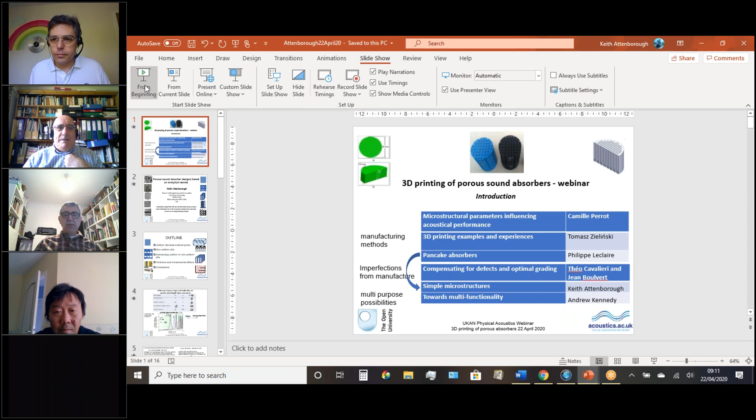So I'd like to explain a bit about how this came about, or how the original workshop where we were going to meet face to face came about, and what I'm hoping the various people that I've managed to persuade to give presentations will contribute.

So 3D printing and porous sound absorbers offers a good new opportunity. Well, I say new, people have been working on it for a few years now, but one of the problems is to do with the fact that the opportunity it offers is that you can actually design a microstructure to give a target performance. And that's quite exciting because otherwise you have to do lots of things in terms of mounting and air gaps and so on in order to achieve a given performance with a regular sound absorber.

The problem has come about because although you've designed this microstructure, when you try and 3D print it, there are lots of imperfections. And we're going to hear a bit about that both from Tomasz Zieliński and from the Le Mans people, Théo Cavalieri and Jean Boulvert.

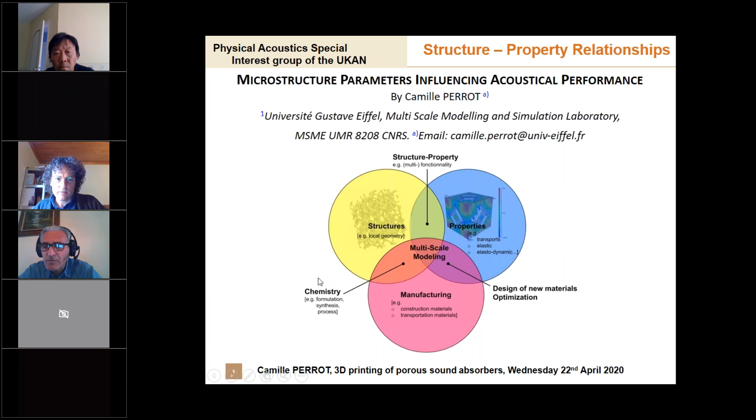So we'll try to skip to the next slide. Here is a rather classical slide.

The motivation is that fibrous media, foams, or granular media are known to be able to mitigate sound from their transport properties, I mean microstructural and transport properties. So basically, we are interested in linking microstructures with transport and acoustical properties, whether we have a periodic or random microstructure.

So the problem will be, in a way, more easy to deal with for 3D printing, because in essence we are dealing with periodic microstructures, and you will see that it's convenient for the classical numerical methods, which are now well established in the field.

So basically, one of the methodologies which has been greatly used in the field is to generate a representative volume element of the porous media, the porous microstructure, assuming a scale separation, which means that the wavelengths for audible frequencies are greater when compared to the sample scale, and also when compared to the characteristic features, the characteristic scale of the microstructure, basically a typical pore size. Another assumption could be, but doesn't have to be firmly respected, the rigid frame assumption.

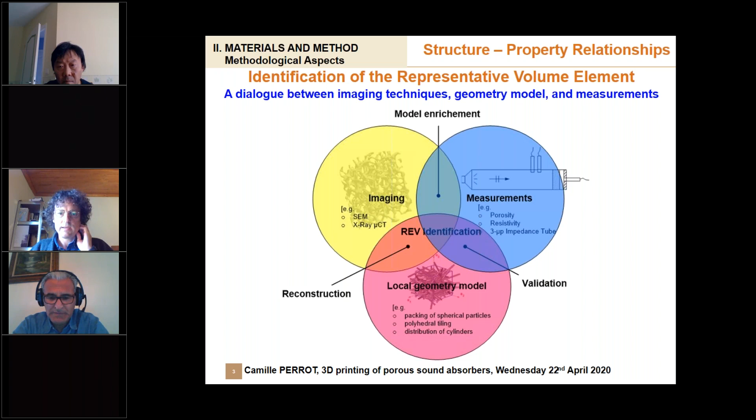So let's go back, but very briefly, to the basic equations governing the permeability, which is an important parameter governing the sound absorption behavior of porous material.

Basically, you have to solve the Stokes equations, which govern the asymptotically low frequency behavior of your porous material. And by field averaging of the velocity field, which is a solution of this Stokes problem, then you can get a rescaled parameter, which is a permeability field.

And when you average this permeability field through your phase field, then you get the permeability, which is a permeability tensor, meaning you can compute it in at least three different orthogonal directions.

This is an important parameter for acousticians, which is basically the reverse of the resistivity times the viscosity of air.

Another fundamental transport phenomenon, which we get at the opposite frequency range, in the high frequency range, is basically the dynamics of the fluid when the fluid is non-viscous, when there are no viscous exchanges between the solid frame and the fluid phase. And then all the physics is governed by potential flow equations, which is formally identical with the electric conduction problem.

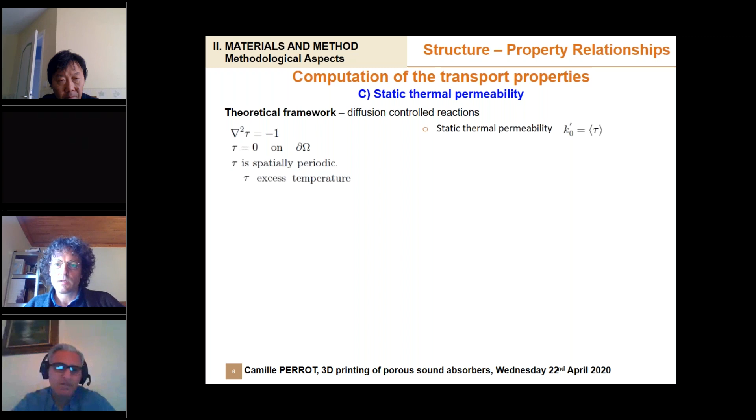All these parameters are included into the Johnson, Champoux, Allard, Lafarge model. And you have some simpler model, let's say Johnson, Champoux, Allard. You can get some connections in between these transport parameters, which are carrying a physics, and some other macroscopic or semi-phenomenological parameters. This is not the only way to describe physics, but this is an interesting way because you deal with macroscopic or transport parameters which are carrying a physics, and you can measure these parameters from direct and acoustical measurement techniques.

Here is a way to measure these transport parameters or macroscopic parameters. Of course, a very important parameter is the porosity. And my experience is that you really need to try to get a very accurate measurement of porosity, because this is the first parameter you will be able to compare with your geometrical model. So if there is no agreement in between these purely geometrical parameters which have been measured and computed, it will be difficult to get this link in between microstructure and acoustical properties.

Then you can measure directly the permeability or the resistivity from standard methods which are based on the Darcy law. And I would recommend measuring frequency-dependent response functions, let's say the dynamic mass density associated with visco-inertial effects, and dynamic bulk modulus associated with frequency-dependent thermal effects that you can get from a 3 microphone impedance tube setup, or eventually a 4 microphone impedance tube setup. And based on this set of parameters, you have basically 4 input parameters, and you can get the remaining ones, which are the tortuosity, the viscous length, the thermal length, and the thermal permeability.

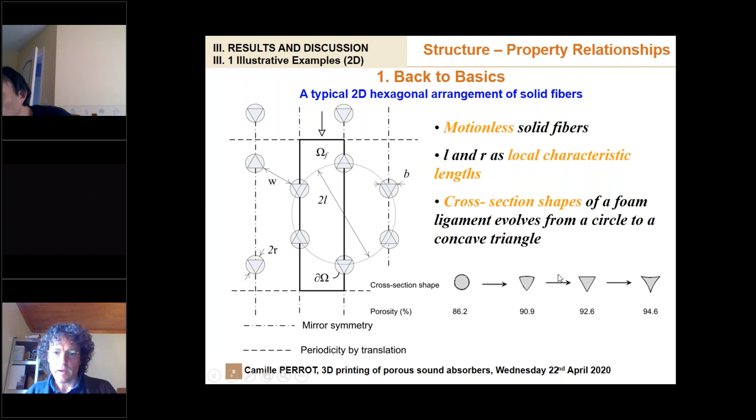So the wave is impinging the sample from one of the perpendicular directions, X or Y direction, and you have basically three microstructural features to describe this very simple structure. You have the fiber radius, you have the pore size, which is associated here to 2L, and you have eventually fiber cross-section shape.

What you can see when you are performing simulations is that the more important, or the first significant microstructural parameter is what is called W here, or the throat size, which is the smallest interconnection size between fibers or between struts, if you are thinking in terms of a foam. As long as you reduce or expand this characteristic size, you will basically increase the level of sound absorption up to an optimum, and then if you open too strongly, or if you reduce too strongly this interconnection, this throat size, then you will reduce the sound absorbing behavior.

Then you can keep this throat size as being a constant size, the one which has been found previously in the range of, let's say, intermediate resistivities corresponding to a strong sound absorption level. And what we saw is that you have a kind of modulation of the sound absorption level, which means that eventually you can tackle some specific parts of the sound absorbing spectrum, but this is less impacting when compared to the throat size.

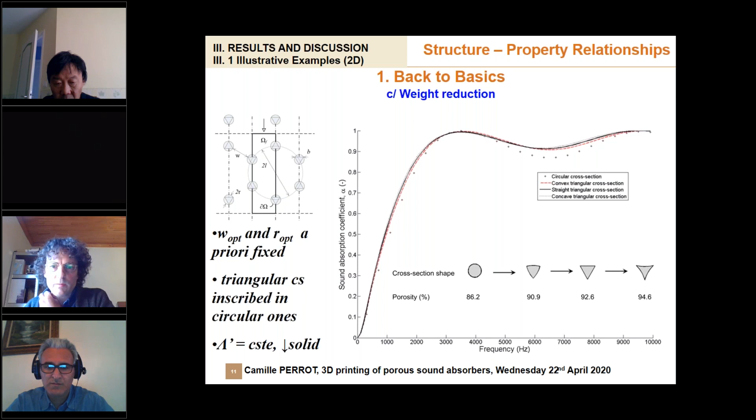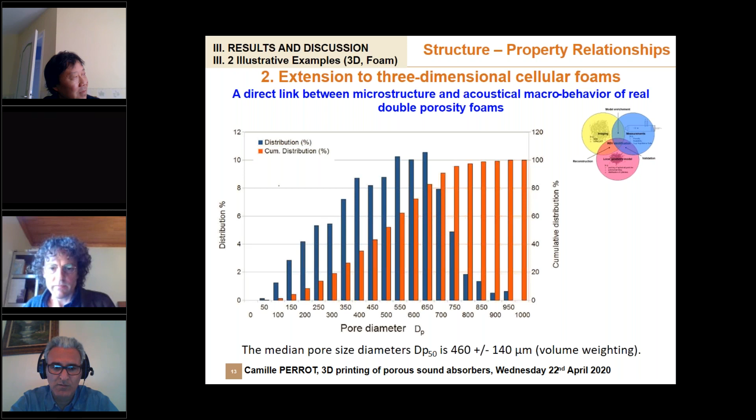So here I wanted to describe a study which has been carried out on gypsum foam, and from imaging techniques like microtomography, you can get some microstructural parameters, the pore size, which is dp here, and the throat size, which is dt. Based on these parameters, you can create a basic model, local geometry model, and here this is a kind of example of this interaction between microstructural information, macroscopic measurements, and the way you can adapt your model or refine or enrich your model.

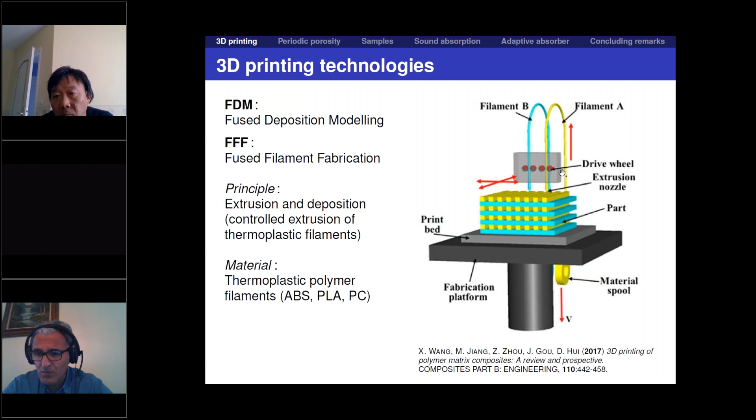Actually, this picture illustrates a, let's say, dual nozzle device. So we can 3D print using two different filaments, which is important because we need to print sometimes technological supports. And we can use this second filament to print the supports because they are some kind of polymers which can be dissolved in a chemical solution. This is a very cheap technology, but not very good quality because there's a low resolution involved. Usually the size of the nozzle is 0.4 millimeters.

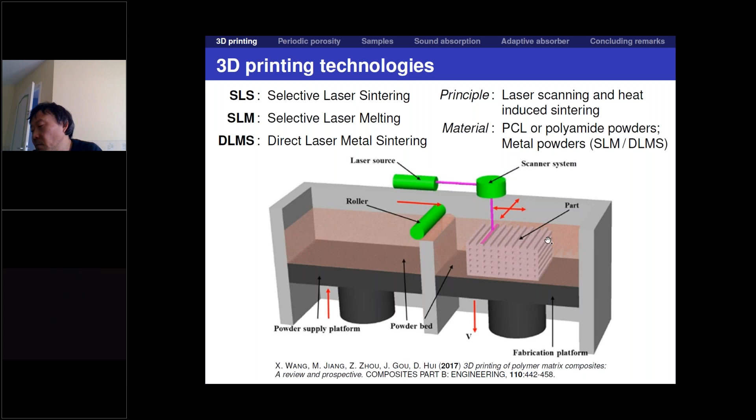So for example, in case of our application, we need to take this powder out of the pores, which is kind of problematic. We need to wear masks and goggles. Right now we are accustomed to that, but this is a very dirty technology. So these are the main disadvantages. The quality of printing is comparable to the resin samples.

Now I would like to show you the first example. This is the round-robin study on 3D printed porous media. In this research activity I invited people from different laboratories in many countries, and proposed that we print the same periodic microstructure, the same periodic porosity, using different additive manufacturing technologies and devices, and measure them in impedance tubes.

For acoustic absorption and surface acoustic impedance, and compare the results. There were many people involved. We have a publication which is under review right now.

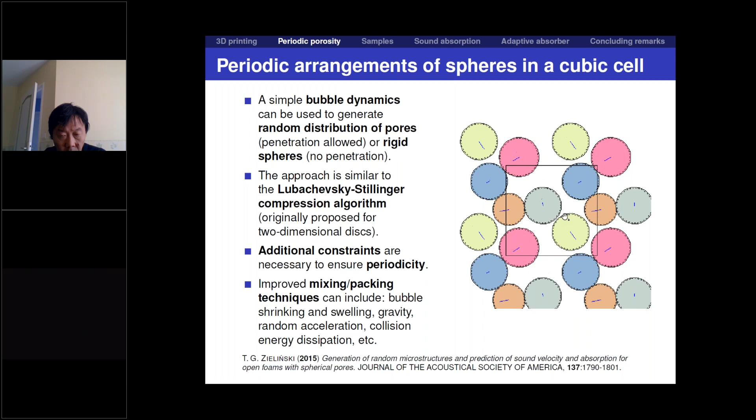And the first geometry that I proposed is based on some kind of random arrangement of pores. We have an algorithm which at each time step generates a random but periodic arrangement of bubbles which may penetrate each other. Eventually, when the algorithm stops, because we decrease the size of the unit cell, the algorithm stops when the required porosity is achieved. It is computed at each time step. So what we got is this kind of periodic unit cell.

So there are 4 pores here of different sizes, with windows of different sizes. This is periodic, but generated in a random way. I also proposed that by rotating this original cell, we generate 3 different orientations that we used for our samples. First I checked these periodic unit cells using my slicer software for one of my FDM printers. The size of this cell is 5 millimeters.

And you see that using my software I can check if this cell will be printed correctly. Unfortunately we have a lot of red areas, which means that here, for example, we shall have an additional window which is not present in the original design. This window will be smaller than the original one, and a little bit rough perhaps.

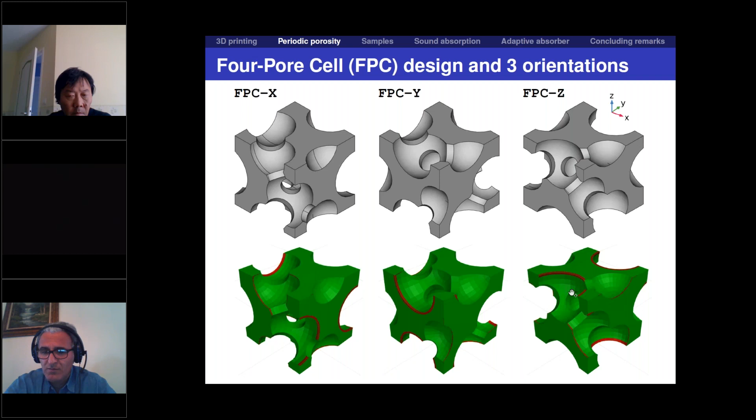So in order to avoid this, I decreased the diameter of all the pores by 10%, and then used the original diameters of the windows linking these pores for cylindrical channels that link the pores that were previously linked by windows. Now you see that this geometry can be correctly 3D printed, and we put an additional unit cell above here, so these red areas vanish completely, and we generate this three-dimensional array, 6 × 6 × 10, so the height of the array is 50 millimeters, and we cut out cylindrical samples with a diameter of 29 millimeters, the same as the diameter of our impedance tube.

Many laboratories did it. There were 9 institutions involved, but 6 laboratories actually manufactured their samples and measured them in the impedance tubes. I also invited 3 additional laboratories to check the acoustical testing results. I'm going to show you only the results for the samples with a diameter of 29 millimeters, so the results from IPPT from Poland, from Université de Technologie de Compiègne from France, and from EMPA from Switzerland. You see that all the technologies are involved.

There were a lot of 3D printers used to manufacture the samples. At my institution, we used even 2 different printers for FDM technology. Here you may see the top faces of the samples. My PhD student, Kamil, printed using a FlashForge Creator Pro. I used a Zortrax M200. You see that perhaps the surface of my PhD student's samples is a little bit smoother than my samples.

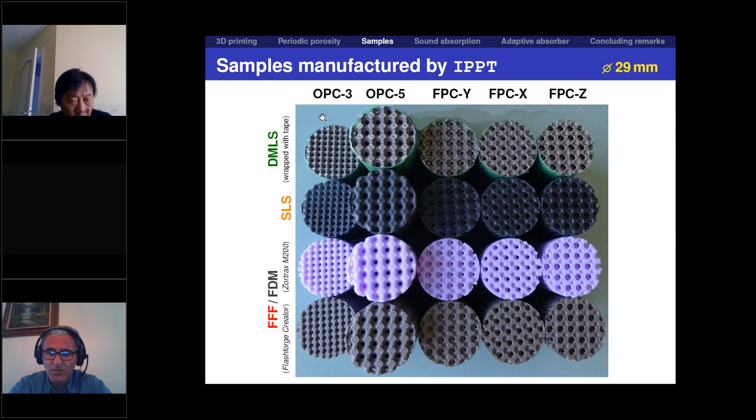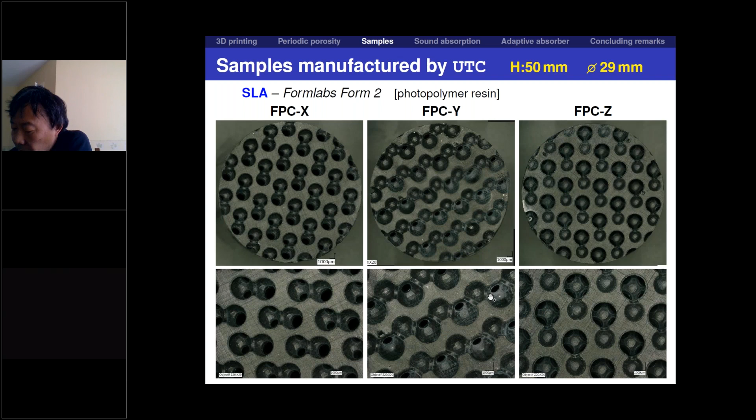These are very nice samples manufactured from resin using stereolithography. I treat them as some kind of reference samples with very nice, neat, smooth microgeometry. UTC also printed samples from polymer powder, but with larger grains, not as fine as we used, so they realized that they actually have the effect of microporosities involved.

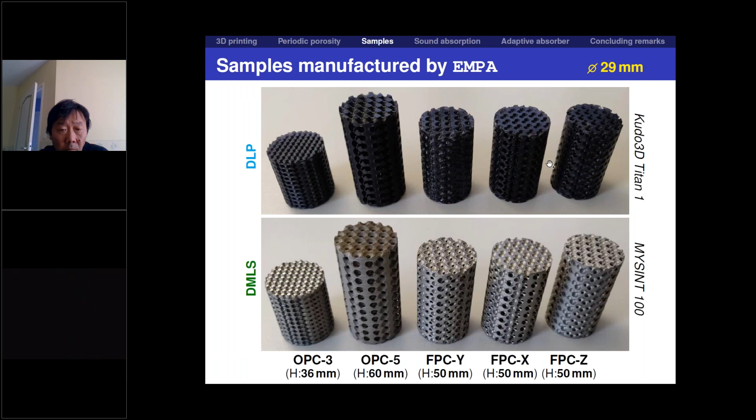Eventually, after measuring these samples, they also impregnated them and measured them again, and it will be very interesting to compare these two results. Finally, the results from Switzerland: resin samples and metal samples, and the results of sound absorption.

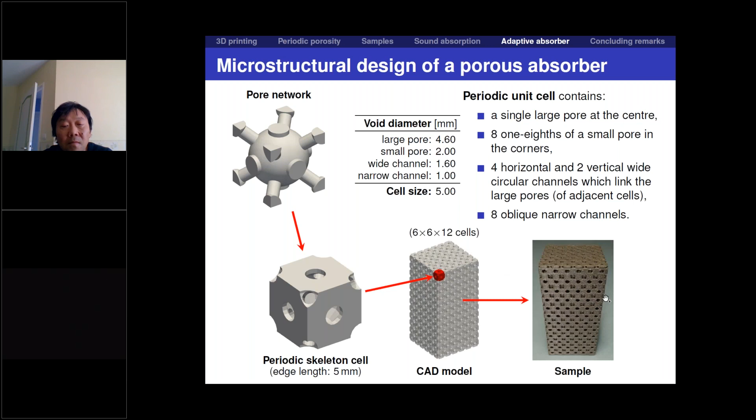So this is the periodic skeleton. For one cell we have an array of these cells, and we have such a sample. You know that we always need to examine our sample under the microscope in order to update the geometry used for calculations to match the actual geometry.

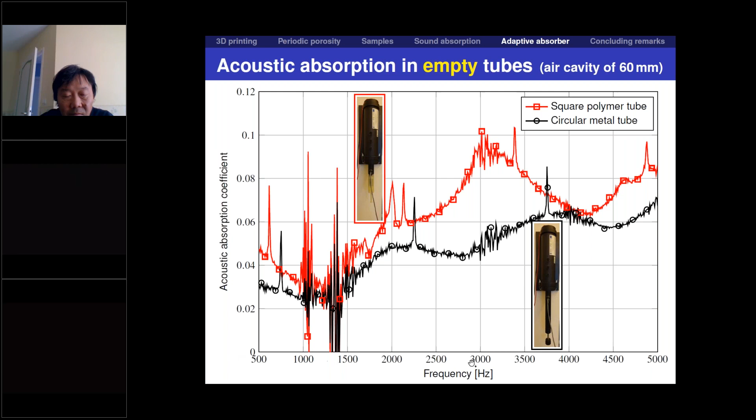Before measuring the samples, we checked that our square tube is not so bad, because here's the absorption in the metal tube, empty metal tube and empty square tube, and the absorption is sufficiently small. Obviously, theoretically, it should be zero, but there are obviously some losses and leakages involved.

Now the transport parameters, which I calculated, were explained by Camille Perrot during the first presentation, for samples without the valve ball and with the valve ball, for propagation in the horizontal direction. In the vertical direction, we have much higher tortuosity and much smaller viscous permeability and viscous characteristic length. So we may expect these parameters are changed, and we may expect different absorption.

Even on the macro scale level, we need to calculate the problem using the finite element method, because we have this cuboidal porous domain linked with a cylindrical air domain. Here we compute only on a quarter of this problem. You see that close to the interface between the air domain and the porous domain, we have non-planar wave propagation, so we need a finite element method to calculate this problem.

Now if we hang the sample on the wall, this valve ball blocks the main path, and the airflow is directed into the skew channels, which have smaller diameter than the large vertical channels, and obviously the tortuosity is also increased. So we move these absorption peaks to maybe other frequencies, which could match, for example, some kind of noise conditions that we want to adapt to.

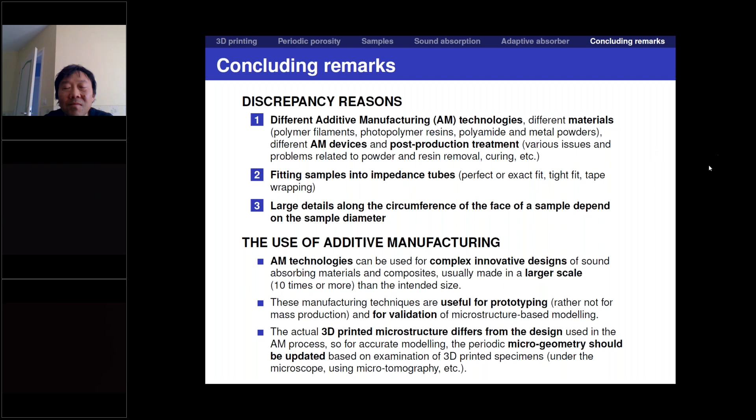Thank you for that, thank you from me too, that's very interesting. Keith, would you take over and ask for questions? Yes, okay, I'll do that.

So, Thomas, just explain to me again how you change the position of the valve balls. It's simply by the orientation of the sample in the tube. Yeah, it was done that way, simply by orientation of the sample in the tube.

But if you really want to think about some kind of application, we may think that it could be done using not only gravity but inertial forces. You may have some rotating device, and the noise conditions, depending on the velocity of rotation, may be different. You can use perhaps some acceleration to change, maybe not in this periodic cell, the position of the tube. Here we use simply gravity, but we also think we could continue this research, because remember the valve ball, the bearing ball, is made of steel. So it's pretty heavy, therefore it clogs the channels very well, but we could also use maybe a magnetic field to play with it a little. It would be at least publishable, maybe not very efficient, but I think it would be publishable if we want to continue with this. But for now we just use gravity.

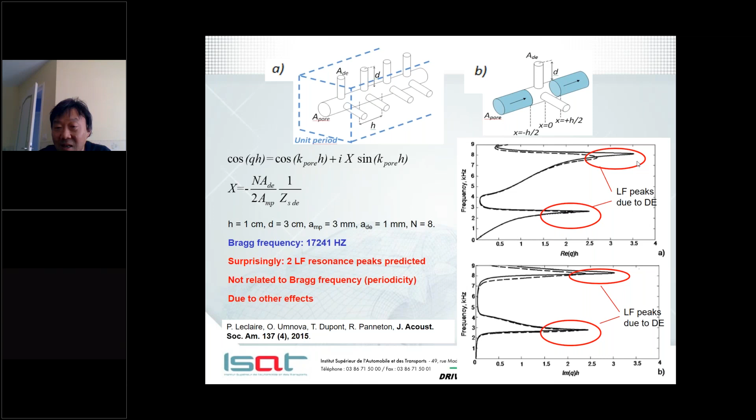So as remarks for this first presentation, we had two important observations. First, ducts with lateral cavities periodically spaced are not new, but here what's different is that the sizes, everything is millimetric or submillimetric, and this is quite original. Well, it was original in 2015 when we studied this. The total thickness of the sample is only a few centimeters, and we will see that there is interest at very low frequency.

So the originality in this study is that the suspected effect is the viscothermal effects, which are accounted for in this structure at millimetric or submillimetric sizes, and these viscothermal effects result in a wave slowing effect. So if you reduce the sound speed in the structure, you will reduce the resonance frequency. This is a resonator which will be used in an absorber, but you reduce the resonance frequency. So this is the physical effect behind this design.

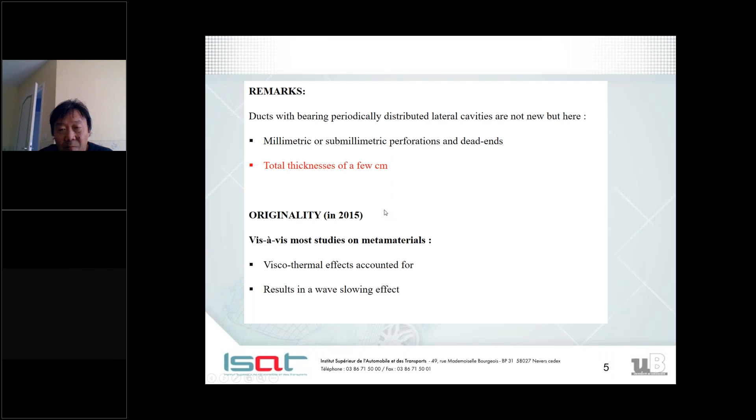A bit more detail on the analytical model, because this will lead us to very simple design formulae. So we have this structure, we have a unit cell, and so you can stack several of these unit periods to create the material. Everything here in the model is basically modeled as a simple perforation without dead ends, but with equivalent properties.

So, wave number, sorry, I have to get rid of this. We have a wave number, and in the model we found that at very low frequency and in the situation where we have short dead ends compared to the wavelength, so the dead ends are not too long, then we have a very simple low frequency expansion of the theoretical dispersion curve, which shows that the effective density of the fluid in the equivalent fluid is that of the main pore without dead ends.

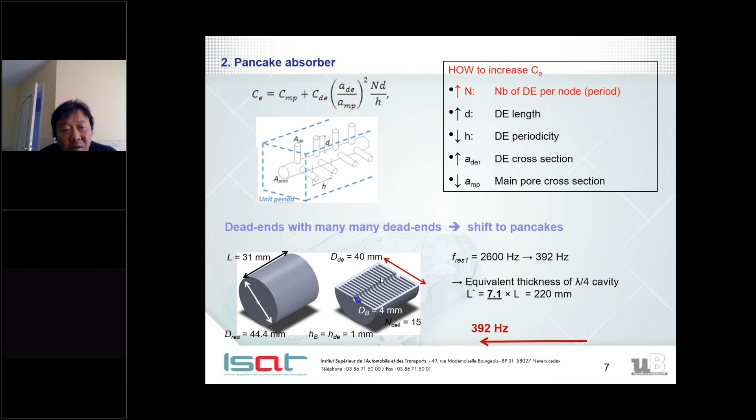And here are a few interesting results. What is important is the thickness of the samples, resulting in the multi-pancake design with the central perforation here. And the resonance frequencies are quite interesting because they are very low for the given thickness. The analytical model is based here on double porosity, one corresponding to the porosity of the pancakes and one corresponding to the porosity of the main pore. Another example for larger thickness, which of course improves the performance at low frequency.

We were also very much interested in the behavior of these materials under high sound pressure levels, and we started to think about modeling this behavior. We had some experience on that already in the past, so we tried to apply it here. The idea was to modify the Darcy's law flow resistivity using a high flow velocity Forchheimer nonlinear parameter. So it's a modification of Darcy's law, including the Forchheimer nonlinear parameter.

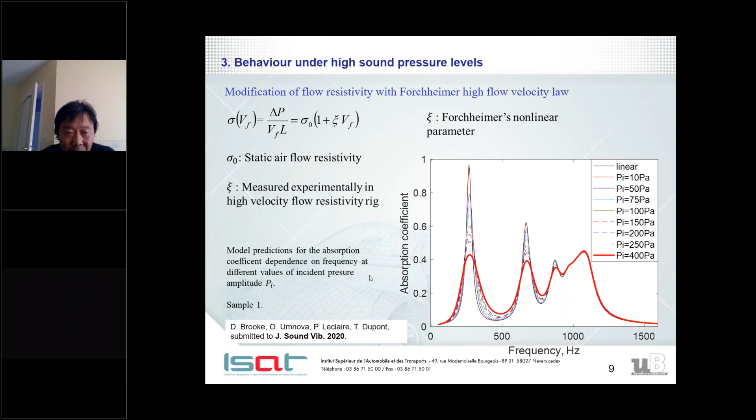Now I'll finish my presentation on some problems we encountered with 3D printing. So we're very much in need of ideas to improve the manufacturing. To illustrate this, I will present this design of the pancake absorber, but with a profiled central perforation. What's the idea behind this?

The idea is first to increase the perforation rate at the entry, also to exploit this wave slowing effect by slowing the wave even more, using a design that is already known by people doing black hole effects in acoustics. So here we try to combine the acoustic black hole effect with profiled central perforation with the pancake design, and this is what we get.

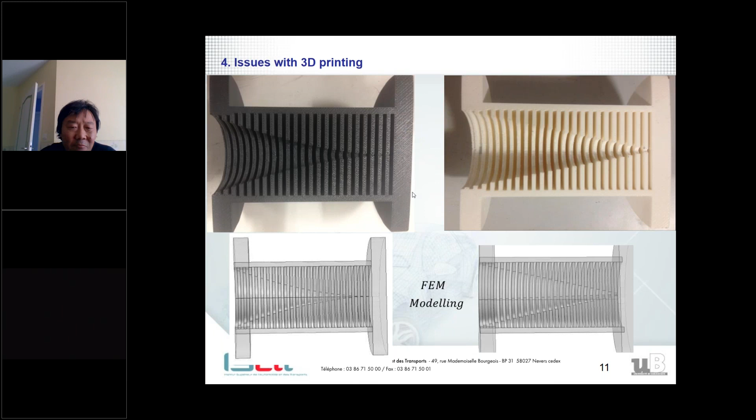And of course, in this technology, we probably get microporosity. And here it's a slightly different technology, but we can still observe that we have some surface roughness and probably microporosity. And so this resulted in strong discrepancies in the prediction of the resonance frequencies and also on the values of the absorption peak, as already shown by Thomas.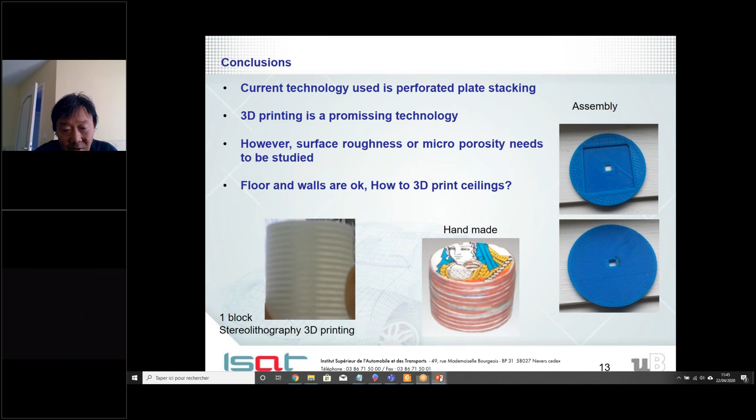But you can also see in the curve, I think, that the general trend is that if the frequency decreases, the quality factor seems to increase, which to me looks like a normal behavior, something that's fairly common. But surely you're right on the theoretical results obtained by FEM modeling. It's clear that the absorption peaks are lower frequency and higher, but they're also narrower. So yeah, it's what I want to say on this simulation.

Here we're not sure of anything, and we were just trying to find some better match by simply playing with the FEM code. And we just showed in these curves that it was possible. But of course, these results shown in the last slide of my presentation are not accurate; they're just here to illustrate the possibility that we can improve the modeling by accounting for microporosity and surface roughness. Yes.

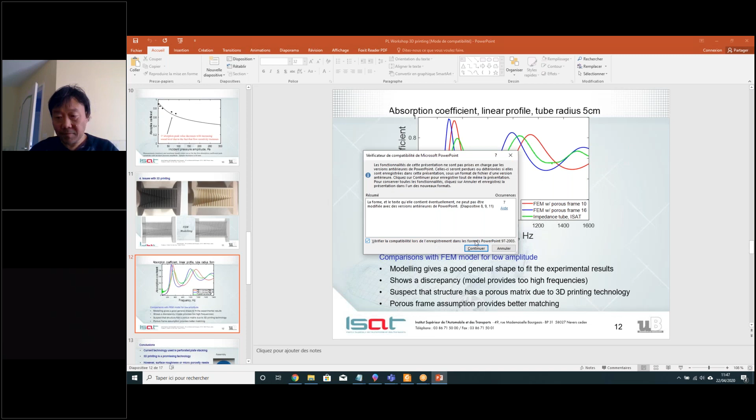Philip, can you stop sharing your screen, please? Yeah, I was just trying to. It must be in the top right corner, little round icon says screen. No, but sorry, I'll do it anyway. So it's coffee break, but before that. No. Okay, it's done. Good man. Okay, I'll see you soon. Okay. Yeah.

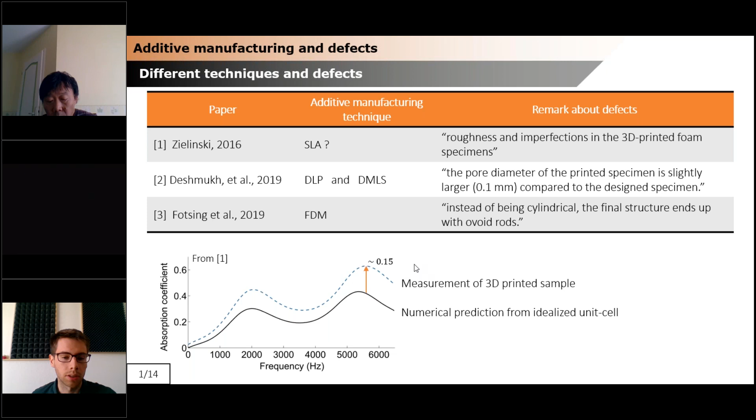I will now cover some problems related to defects and anisotropy. We've been talking a bit about anisotropy this morning. I think Cami involved it in the homogenization process, and also Thomas with the valve ball, which is actually a kind of selective anisotropy. You can imagine this very simple unit cell, which has different size pores in different directions.

So you have those two anisotropic properties: one is purely related to the design of your unit cell and the choice of it, and the other is purely linked to the inherent defects of the additive manufacturing technique.

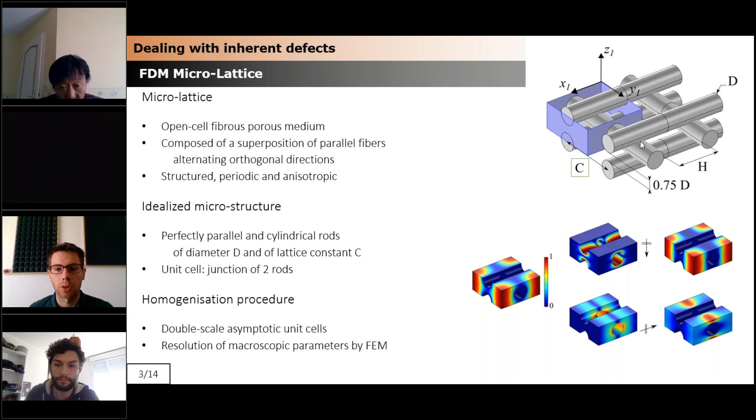We 3D printed this material using fused deposition modeling, a very simple method where you extrude a melted filament and place them on top of each other, which really suits the printing of such material. With this technique, you can easily tune the lattice constant, the distance between filaments, by changing one parameter we call the infill factor. Here you see, for two different infill factors, the resulting microlattice. For those more used to felts, changing the infill factor corresponds to changing the compaction rate of the felt.

I will now cover the defects that occur during the 3D printing of such a microlattice. The first one is that during deposition, since the nozzle is connected to the previous printed layer, the deposition is constrained, so the cross-section area of the filament is not perfectly circular, but rather slightly elliptical. This is well observed throughout the FDM process; you cannot consider a perfectly cylindrical cross-section area. Another effect that appears during deposition is a striction phenomenon, as seen in the orange pictures.

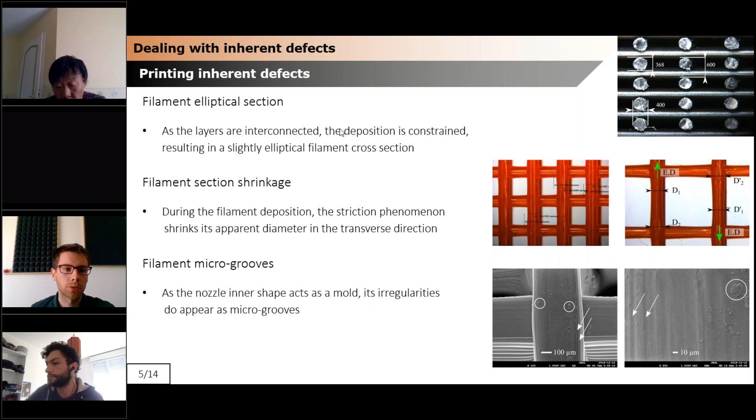So to account for these defects, either you can change the unit cell to account for them, or what you can do is directly do the work experimentally. We can use inverse acoustic characterization to retrieve the intrinsic acoustic parameters of a homogeneous sample.

Basically, you put a homogeneous sample in an impedance tube, and with some method, you can come back to the acoustic intrinsic parameters. In this way, you can obtain the acoustic parameters of the microlattice for different lattice constants. So what we did first is compute, from the idealized unit cell, the variation of its acoustic intrinsic parameters for porosity, tortuosity, and so on, with respect to the infill factor, i.e. the lattice constant.

So we computed them from the idealized unit cell, here shown as the blue lines. Then we set some inverse characterization bounds, shown as the green lines. These bounds were set accounting for the numerical results of the defects.

For instance, simulating the defects, we saw that the viscous length tends to decrease when considering the defects. So we said, during the inverse characterization, the viscous length that we'll get from experimental measurement must be lower than the one from the idealized unit cell. Then we performed the inverse characterization on, I think, 8 homogeneous samples having different infill factors.

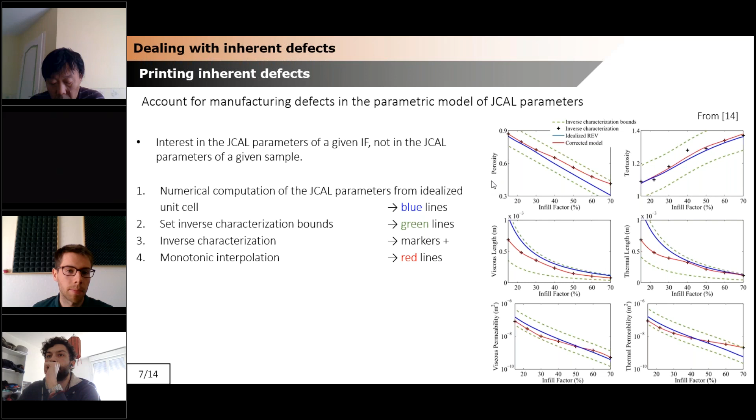Okay, so we will now talk about optimization of graded media. What you have seen so far was purely homogeneous medium. Now we will show you different approaches to actually model graded properties using geometrical gradients. So just a quick overview of the propagation and optimization methods that we have been using during the past years.

For the propagation, we have very common techniques such as the transfer matrix method, which has a very low computation time and an analytical derivation. We also have been working with Peano series and wave splitting techniques, which require higher computational time but may give you insight on the losses inside the material. So this is mainly for propagation techniques, which allow us to predict the absorption and reflection properties of graded medium.

And regarding the optimization, what we do is set different cost functions, for example to cover frequency and angular ranges, and they are defined also relative to absorption, reflection, or even impedance that are going to be minimized. Those graded properties can then be modeled in different manners.

You can, for example, try to optimize the geometrical parameters for different successive layers. But depending on your discretization, you may have to optimize for very large dimensions, but you can reduce those dimensions using interpolated polynomials and so on.

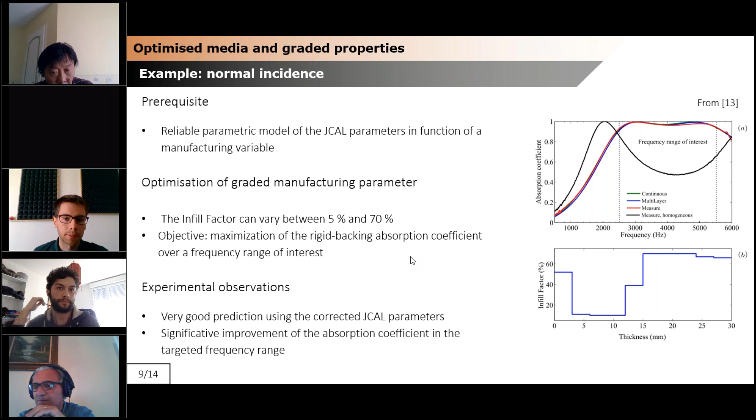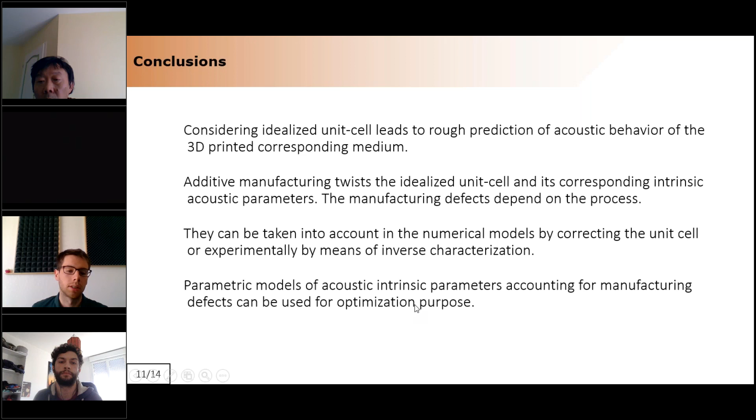Regarding the perspective we are going to look for, one thing you can also try is to print unit cells with very high aspect ratio in order to control these anisotropic properties. So this is something we look into.

Regarding the defects, we are going to also work more on imaging techniques. As Chami said this morning, we can use scanning electron microscopy and computed tomography to go deeper inside the structure itself and see if we have great repeatability and periodicity inside the layer, and also account for, I mean, to actually quantify the defects that have been printed.

Also, we can optimize the transverse properties for optimization of sound absorption in line depths. That's pretty much it.

Regarding the micro grooves and all this kind of roughness, obviously we need to take it into account, and perhaps Camille Perrot will correct me, but there are works like by Cortis et al. which may introduce some kind of roughness on the surface in order to increase the viscous effects regarding the dissipation of acoustic waves. However, sometimes we may look at what is really the reason for the discrepancies between the measurements and the absorption.

For example, I know that John Kennedy from TC Dublin, who was involved in our round robin study, also does the modeling and calculations, and it is maybe a little bit of a controversial approach, but to fit his curves he artificially increased the viscosity of air. And then he claimed that this is really roughness and viscosity which is responsible for the discrepancies.

Another comment, which is also a little bit obvious: we should obviously compare and maybe directly measure the effective bulk modulus and density, which is possible right now. For example, people from Matelys develop this kind of improvement for impedance tubes that you can use to measure these complex curves directly and compare the real and imaginary part.

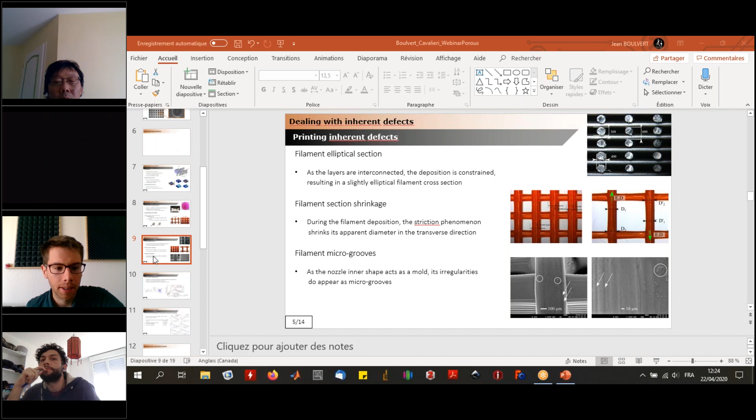Well, one thing is about the rugosity and changing the properties of air. But what I would say, from what we have seen in the simulation and experimental data, is that it mostly impacts the viscous and thermal lengths. That is normal, because if you look at the definition of the characteristic lengths, they depend on the ratio of the surface divided by the volume of the unit cell, the surface between the air and the solid structure. And if you have roughness on the surface, then the surface of the fibers will increase. So it's normal that the lengths will decrease. So yeah, that was just a comment.

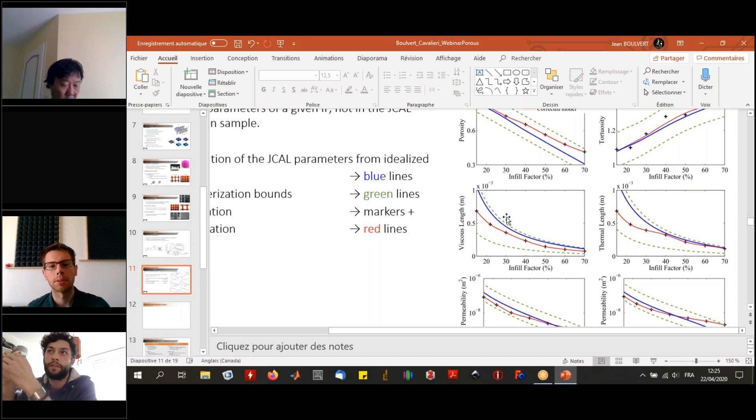Yeah, I wanted also to comment on that, as what Thomas has said regarding the viscous effects.

So basically what we've been seeing from the homogenizations by finite elements we've been conducting is that microscopic defects actually completely change the fluid-solid interface. Since the thermal and viscous characteristic lengths are purely based on the ratio of the fluid-solid interface and the fluid volume, you can actually change the thermal and viscous lengths by a factor of 2 if you have those ruggosities on your filaments. So the printing defects here have a very strong impact on the length.

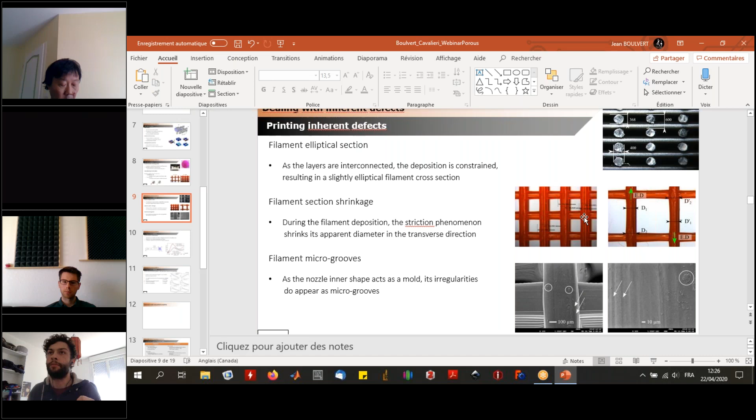And also one other point you raised, Thomas, regarding the characterization: we do the retrieval of complex density and bulk modulus using 4 microphone techniques. What's also done, the impedance tube uses 2 microphones. But what we do for the inverse characterization of the acoustic properties and transport parameters is using Bayesian techniques in order to fit the corrected JCAL parameters.

I don't know. Can I say something, please? Yeah. I think I have a technical point and then a commercial point.

So the technical point is that we should catalogue the defects that improve the absorption, because at the moment you're allowing for them accidentally. But what about the possibility of introducing them deliberately? That's my technical point. And the second point is Safran aircraft engines are interested in your work. Is that because they can foresee 3D printing of aircraft engine linings?

Okay, maybe I can answer the first point. In my opinion, the defects can have a good or bad impact, but from what we've seen in the microlattice, the defect itself is not good or bad. It just has a certain impact that increases the losses of the material. So usually when you don't have enough losses in your material, increasing the intrinsic losses gives you a higher absorption coefficient, which people see as good. But if you are supposed to have a perfect absorption coefficient and you increase the losses again, then the absorption coefficient will be lower than predicted. So the increase of losses due to defects is not inherently good or bad, they are just what they are. Though I agree some defects could be beneficial, for instance by decreasing the absorption peak towards low frequencies. But regarding the increase of intrinsic losses, I'd say it's neutral.

Those are my grandchildren. Lovely. Now I've got to find the presentation. Okay, so are you all ready? Yes, please.

So I think we've heard some very interesting things about what can be done by designing a microstructure from scratch to do a good sound absorbing job. To some extent, this work has been anticipated by people interested in micro-perforated sheets, because they've not had the distraction of trying to explain the absorbing properties of bulk manufactured materials. They're artificially manufacturing everything, so they've been able to go into detail on what they can achieve by changing the shapes of slits and perforations, their density, and looking at end corrections and this kind of thing. So to some extent, people interested in bulk absorption are maybe a little bit behind.

So I'm going to talk about what might be achievable using simple pore structures, particularly ones for which analytical models are available, because if eventually you get into an optimization process, it's going to be numerically and computationally much more efficient if you use analytical models.

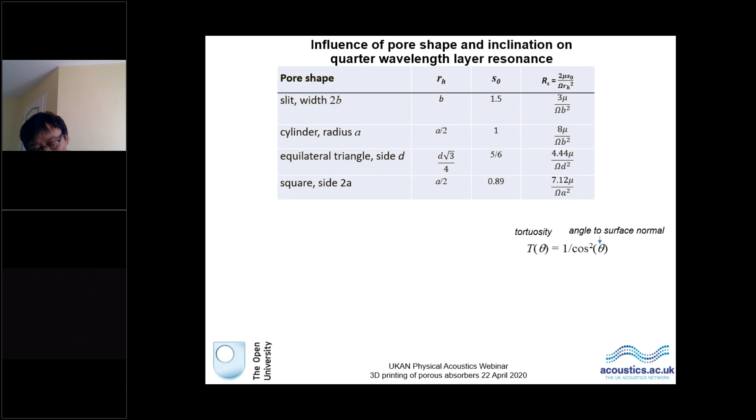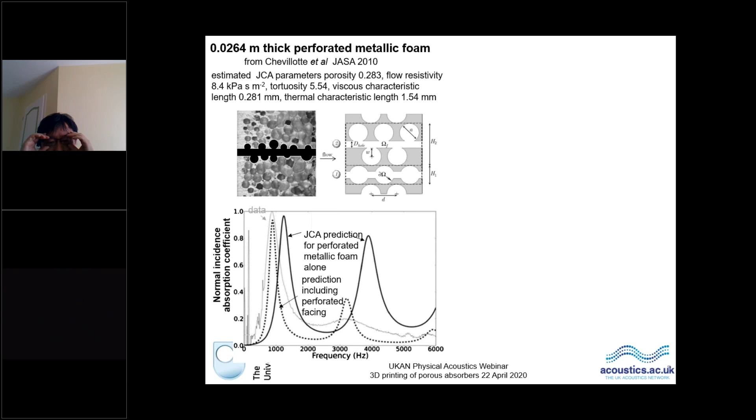But let's just look at what you can do in terms of getting an equivalent result for the non-perforated facing situation by just using inclined pores and inclined slits. And with those parameters, you can actually reproduce that perforated metallic foam. So here is a very simple microstructure that's giving you the same kind of absorption coefficient as you might get from a bulk manufactured material with a much more complicated microstructure.

So again, we go back in time to Champoux and Stinson, who went to the trouble of actually creating a material with non-uniform pores. I've forgotten now what materials they were using, but maybe latex, rubber tubing, and some kind of other way of getting increased. I think they cut grooves in Perspex case. Oh, Perspex, right, okay.

And essentially they found that even when you had pores normal to the surface, this increases the tortuosity inside the material, and therefore you change the acoustical properties. And because they knew precisely what material they created and the characteristic dimensions inside it, they were able to predict what it should do in terms of the real and imaginary parts of impedance and the real and imaginary parts of propagation constant, and that fitted pretty well with the measurements they got. So if you deliberately create non-uniform pores, you can change the acoustical properties of a thin layer.

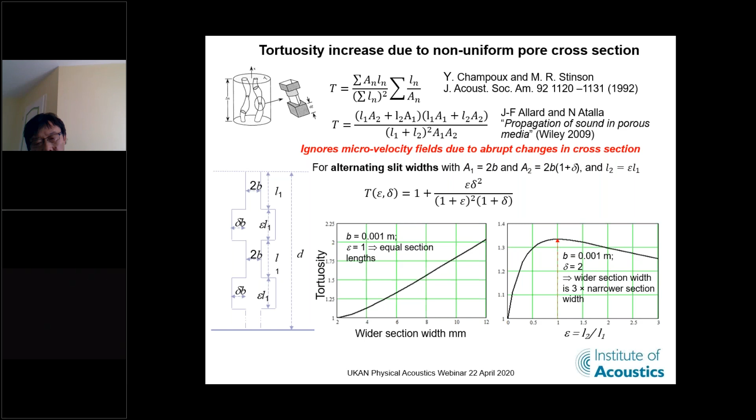If you like, this is a kind of artificial roughness, hence all my questions about what happens if you deliberately make use of some of the defects you're finding due to roughness or rugosity, as the French like to call it, in the pores. So I think you could set out to deliberately create non-uniform pores in order to get a target absorption performance.

There's another paper. I mean, all of these ideas basically have not yet been validated. Sorry, I'm going to talk about one piece of validation that's occurred as a result of collaboration with Thomas, for which I'm very grateful. But anyway,

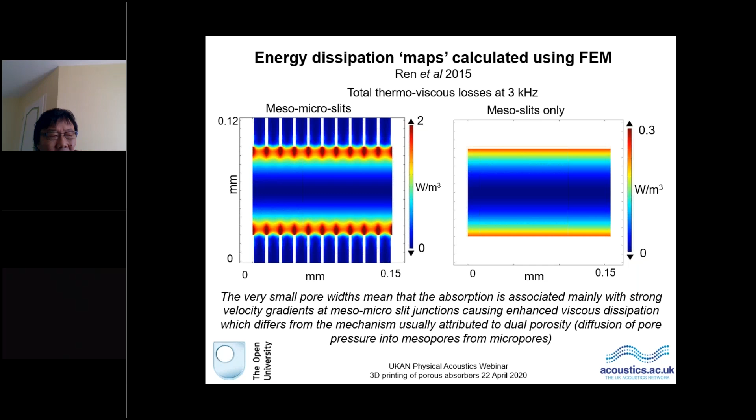So I had a go at seeing what you could do to try and reproduce this by having intersecting slits and cylinders, because basically if you take a set of slits and you perforate them, then you've got intersecting slits and cylinders, at least to my naive way of thinking you have. But of course it gives something that's quite different from what's predicted by Thomas and his student. And even if you incline the perforations, it doesn't produce the same kind of effect. So something else is going on, which would be quite interesting to investigate.

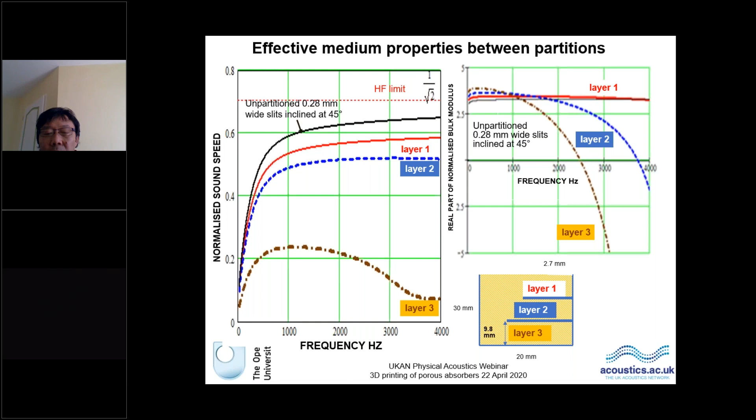I think this is attributed in the papers to some kind of resonance that's going on, that these horizontal partitions are creating side branch resonances, I suppose, not that dissimilar to the dead end pore structures that Philippe was talking about. So here are my conclusions, and I've shown you all how to give this talk in less than 20 minutes.

Yes, Kirill. Are you going to read the conclusions, or just leave them on the screen? I'll just leave them on the screen. Well, I suppose I've got 2 minutes to read them, so I'll do it.

So, increasing tortuosity is a way of improving the low frequency absorption of a thin layer, because essentially, in the same way as Philippe was describing, you're slowing down the sound speed within the material so it effectively becomes thicker. You can increase the tortuosity in several different ways. You can incline the pores, you can make them non-uniform, you can intersect them, and you can use combinations of all these things.

Another way you can do it is by partitioning, at least in principle. I haven't yet seen the experimental data, but partitioning, either vertical partitions with gaps underneath some of the alternating vertical partitions, or horizontal partitions, which also give you the additional parameter of the slope of the edge of the horizontal partitions, can also change the absorption behavior. So here is a totally different way, it seems to me, of designing a microstructure to give you a target absorption performance. Thank you very much.

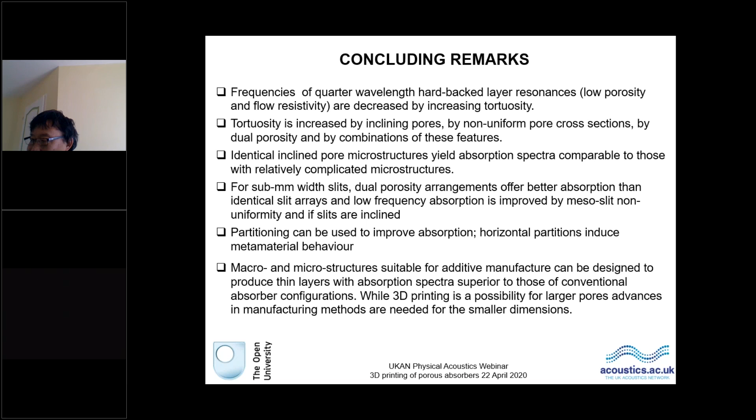So eventually my PhD student Kamil Opiela used our FlashForge Creator Pro FDM 3D printer, and he achieved this. If you remember the picture, the slit was thinner than the size of the nozzle. So it is achievable. Obviously, the wall between the slits was at the size of the nozzle or something like that.

So sometimes the choice of the 3D printing technology is not so obvious, because we wanted to do it with our new SLA printer, and eventually we finished with our old FDM printer. So this is a comment. There are a lot of these kinds of problems involved when you want to manufacture your samples. Thank you.

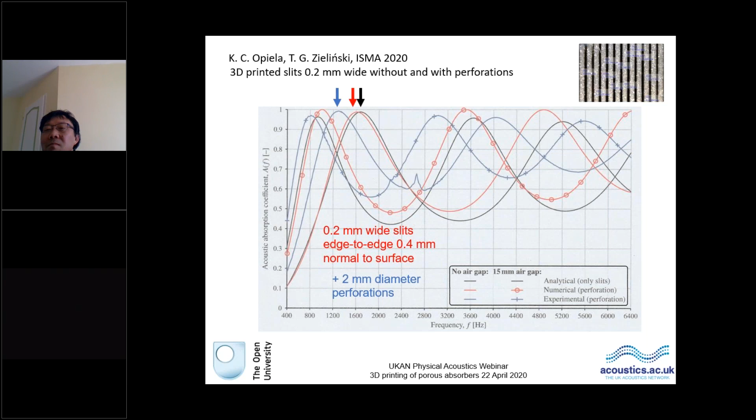Keith, one comment came from Francois Xavier Bécot. I don't know if we have a chance to read it. He sent a reference to a paper they published which I think is relevant to what you've done as well. It's a JASA paper from 2015 on the modeling of viscous thermal dissipation in heterogeneous porous media. I don't know if you have a comment on that. Well, I'll look at it, I haven't looked at it yet so far. Anybody else?

Maybe just one more comment. John Kennedy here from Trinity. Very interesting stuff, Keith, and I really agree with you that we should be looking at the defects and how to use them in a beneficial way rather than anything else. I'm sure Thomas will agree that sometimes we're designing things that are not geometrically suitable for the print process. For example, in SLA processes we're really using voxels, which are cubic units, but we're asking them to make cylinders and things like this - you can't really make a cylinder out of cubes. I think if we design our microstructures to suit the 3D printing process, we might get a lot more benefit and a lot more accuracy.

Yes. Do I have something to respond to this? No, I'm grateful for that comment. I'm glad that at least one person agrees with me.

Yes, maybe the general thread - you see, a lot of these efforts are going now to reduce the thickness of the absorbers. So in comparison with wavelengths, has any effort been done to produce something like what his name, the guy from Cambridge who developed this famous chart on the structure or the density against the porosity thing - just produce a chart of different technologies.

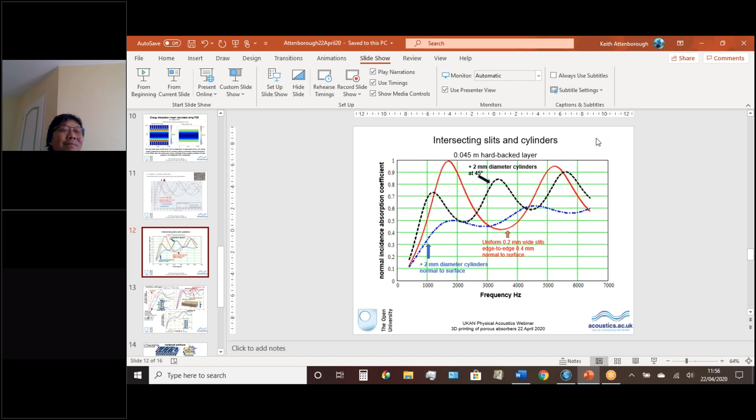Just a comment - we already have 3D printers with which we can really print at that scale, called nano 3D printing or something like that, but this is really very expensive. Professor Venegas, I think he does a lot of research on that topic. Well, here you go, see? Because once you get to sub-millimeter, sub-micron scale, the physics become very different, and that opens opportunities to make these absorbers, controlled absorbers, more compact, perhaps.

Anybody else? I may have one comment to react to what Thomas just said. Now we have more and more printing techniques that tend to be extremely accurate. I think one of the main problems is merging the scales. For example, printing with accuracy relative to a micrometer, but printing actually centimeter-thick samples - that's one of the main reasons why it's so difficult, because it's very hard to have such accuracy but also have macroscopic samples on the order of a few centimeters, because it requires a lot of time and effort to realize such structures.

I also wanted to join Keith on this point regarding tortuosity in his concluding remarks. From what we have seen regarding the optimization of porous media, we observe this variation of tortuosity across the layers. Sometimes we observe impedance matching properties, where you have a very low resistivity material where the wave impinges, and then across the depth of the layer the material becomes more and more tortuous and more resistive. But we also observe the opposite - a layer which is highly resistive at the entrance, and then it becomes looser in the bulk. So we observe those gradients of tortuosity that impact a lot the absorption, at least for small layer thicknesses. That was just a small comment I wanted to add.

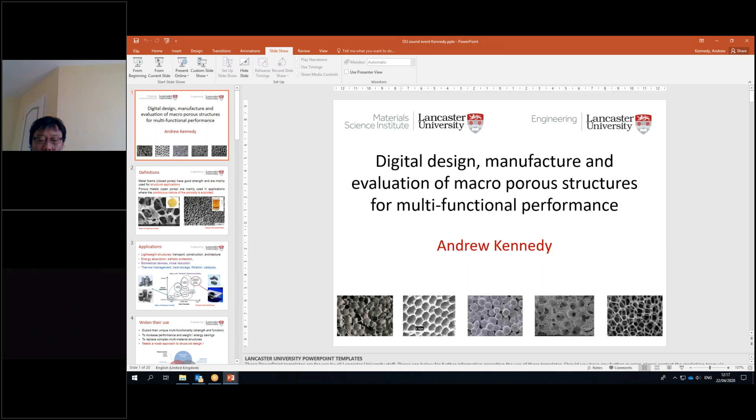I want to give a reasonable overview of our approach to digital design and manufacture of macro porous structures, with a real emphasis on multifunctional performance. One of the most useful initial things is around the definitions of the materials. We can be talking about open cell or closed cell materials. From the perspective of functionality, we're really interested in open cell structures that allow the transport of various different media through them, and it's important to make the distinction between the two terminologies.

Our open cell structures are rather like a sponge, and our closed cell materials are rather like the froth on a decent pint of beer. In the context of sound, we recognize the structures on the left-hand side as the sort that have traditionally been used as sound absorbers. But within the metal foam community, the structures on the right-hand side have been used as well, which might sound counterintuitive since they're closed cells. In fact, the manufacturing process and post-processing causes the cell walls to crack and perforate, and they become reasonable sound absorbers as a result. I'll chat a bit more about this later.

The next slide's central image shows the types of applications for which foams are used. On the right-hand side we have the load bearing structures, which are predominantly closed cell foams, used in lightweight structures, transport, construction, and architecture. They have good energy absorption properties too, so they're used for impact and ballistic protection. On the extreme left-hand side we've got the very open structures, the porous metals, used for thermal management, heat storage, filtration, and catalysis type applications. In the center ground, we've got partially opened or limited interconnectivity between our porosity, which is currently used in sound absorbers and biomedical implants.

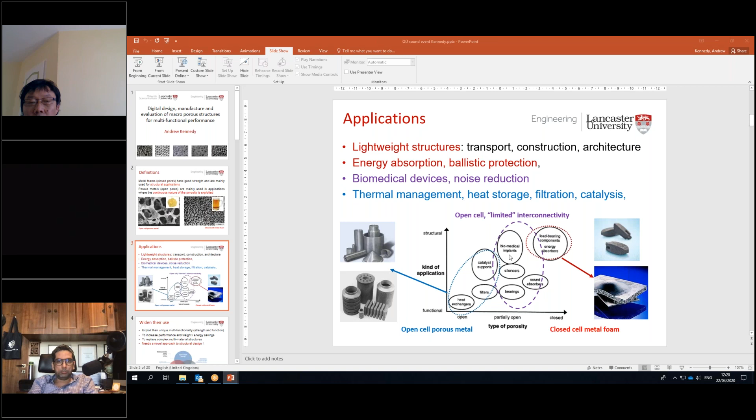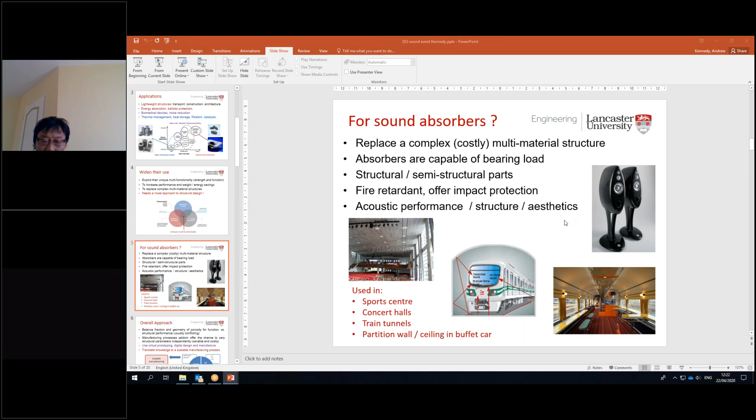Our overall approach really is to look broadly at this challenge, which is around balancing the fraction and the geometry of the porosity to fulfill the function. In this case, we might be talking about sound absorption and the structural performance, and often these are conflicting. We usually want as much metal as possible for structure, and maybe as much porosity as possible for fluid flow or minimizing pressure drop, whatever that might be.

What we find is that traditional porous structure manufacturing processes don't give us the chance to vary all the different structural parameters that we need independently. So it means we can't change pore size and connectivity and porosity and do a very detailed study of what the important factors are. This approach also has variability in the manufacturing, meaning it's quite difficult to study individual components in a rigorous fashion, and it can often be quite costly.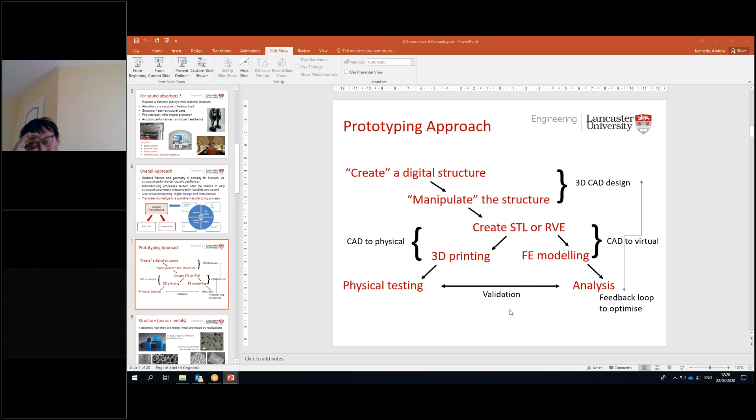Oops, I hopped right back to, yeah.

It makes sense to look at the actual structures of porous materials at the moment. Commonly, they're made by coating a polyurethane foam and then burning out the residual polyurethane, which gives traditional open structures that look like traditional polyurethanes.

This creates structures where the walls are very, very solid. We've already talked about how we need to match the things we build to the structures we might want to use in our parts, and I'll come to that later. But we do see a commonality: both approaches give near-spherical pores in a fairly broad size range, connected by roundish windows typically in the range of 100 to 700 microns.

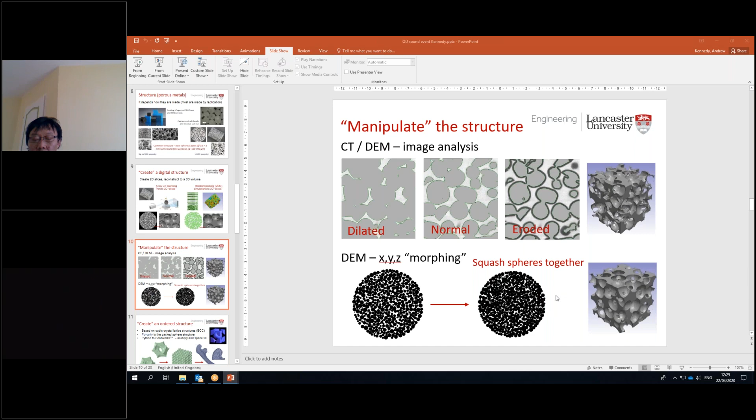We can manipulate these structures too. For CT and DEM, we can do simple image analysis of our as-achieved structure, dilating and eroding it, then reconstructing it. With DEM models having X, Y, Z coordinates for all spheres, we can apply algorithms to shear, morph, or squash particles together to alter our structures.

Of course, we then need to print a 3D version of our model. It's worth stressing that in many cases the application will require large metal parts, and AM isn't really likely to deliver these large parts at the volumes people want. But AM and 3D printing is vital to this virtual prototyping approach. Metal technologies are improving, quality is going up, cost is coming down, but the resolution is still rather limiting for a detailed, comprehensive, and accurate study of the influence of structure on performance.

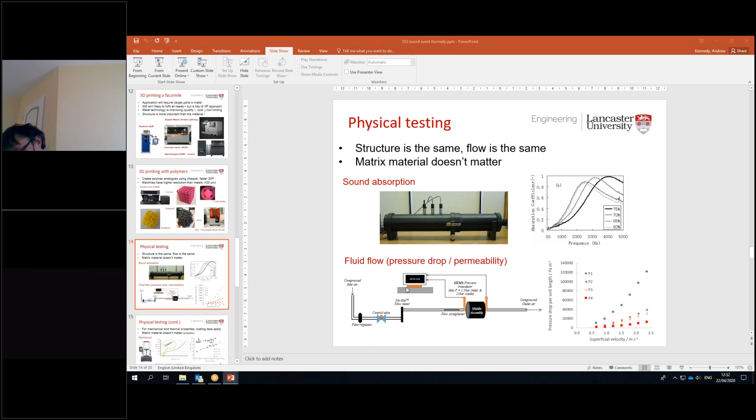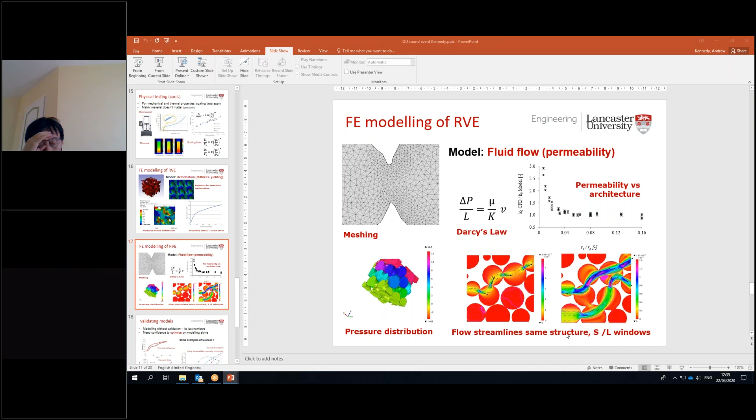Similarly, there's good modeling to be done on fluid flow, meshing the inverse of our structure, the gaps between the material. And again, looking at pressure distributions to integrate with things like Darcy's law to look at the permeability, and looking very keenly at the changes in permeability as a function of architecture. So at the bottom, we show flow streamlines, and we can get pressure drops from similar analyses as a function of the level of connectivity between the structures, the size of the gaps between the spheres. We can look at local perturbations in flow, and at more global effects on the pressure drop and the permeability of the system.

So where does that leave us? It still leaves us with some fairly significant research challenges. Creating and manipulating digital structures requires a flexible framework to generate the structures, manipulate them and get them ready for the next modeling steps. And this can be computationally very demanding, particularly if you're trying to create real structures. We're looking intensely at modifying these approaches to make them as simple as possible.

Within the modeling area, our final goal is modeling different properties at the same time. At the moment, we're just looking at one at a time. Really, we would like to overlay these and optimize for a number of different parameters within the same modeling framework.

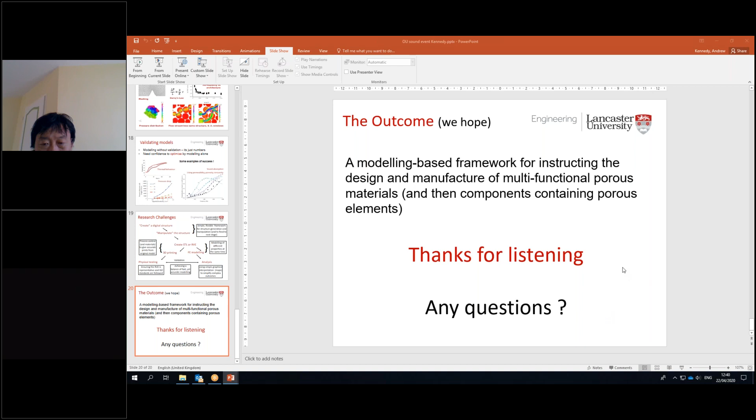Yes, there's no harm in concluding before 1 o'clock if that's possible, but I just wanted to comment, of course, again, you're starting, Andrew, from the kind of microstructures that are commonly produced for bulk manufacture. So do you see any role from starting instead to design a microstructure which satisfies all the requirements that you lay on it?

I think it's quite a sort of philosophical question, that. There's a difficulty trying to reconcile the manufacturing routes for different types of products. If we're looking at high volume applications, I think there's no way that we are likely to use additive manufacturing to deliver the products that are required. People have talked about design for additive manufacture as a way of building up these structures, but they're still going to be quite niche.

To deploy them in transport applications, where they've got obvious benefits for noise reduction in aircraft, impact protection, whatever it is, we're going to have to adopt scalable manufacturing processes, and they are not likely to involve 3D printing and additive manufacture. So the perspective we've been looking at is really trying to move a little bit back from the structures that are typically used and looking at how we can sensibly modify them within a framework which is realistic in terms of actually manufacturing them on a bulk scale. Did that answer the question?

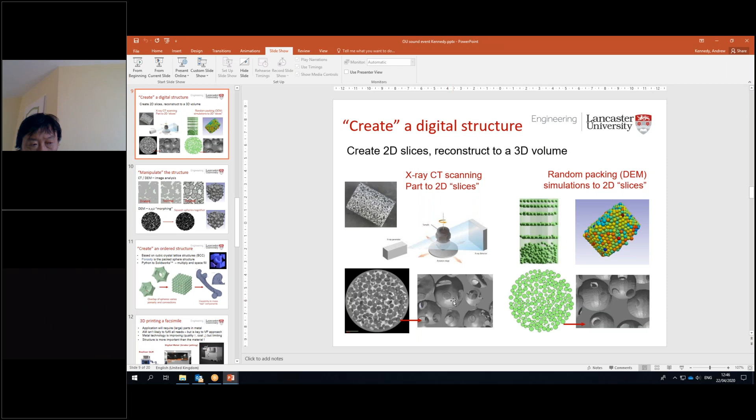Your comments about the printing on 13, I mean, I agree completely. We've got a mixture of different systems, and we use a number of different resins to try and improve the removal of the resins, and we can use a number of different flushing systems to try and flush it out. So once you restrict the permeability, inevitably you can have some issues. And we get some quite good results from daylight curable resins as well.

But the system on the top is a polyjet system which deposits a support material, so we can go down to smaller sizes, albeit on an expensive machine, which uses water-soluble support. And although it takes a while to get all of the support out from the very finest of channels, it is achievable, so we can get finer detail in those systems. That being said, when you look at manufacturing processes for metallic foams and porous metals, the smallest apertures tend to be of the sort of 200 to 300 microns in diameter.

So again, it's a philosophical question. Do you design something that you can never make, but actually is the perfect absorber, or do you move back a bit and say, well, actually, I'm stuck with a series of current manufacturing processes. I have to work within that framework to see what changes I can suggest to improve the performance. On that basis, there's a lot of materials used as sound absorbers which are far from ideal. They're just there because they can be made.

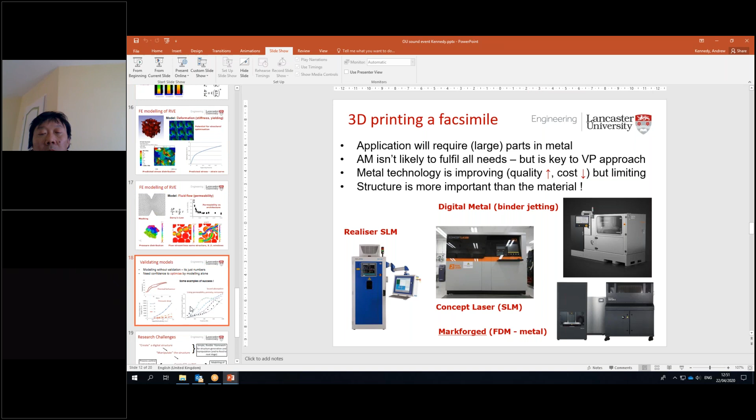Hello, I think Francois Xavier, you had a question as well about slide 18. Francois Xavier? I wonder if he signed out now. Andrew, maybe you can just read this question later and respond to Francois Xavier. Yeah. Okay.

Okay, so Kiss, unless there are some very urgent comments, shall we just wrap it up? Kiss?